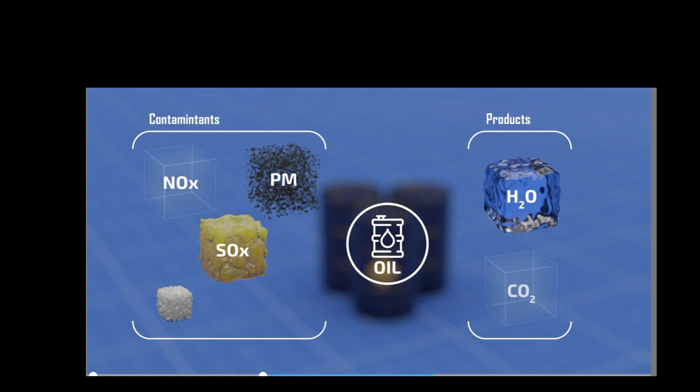A range of legislation such as emission control areas, ECAs, has already been introduced to try and limit the damage from these products of combustion, but ultimately to reduce global warming, the marine industry needs to drastically reduce the amount of CO2 and other greenhouse gases produced by shipping.

In 2023, the IMO's target was to reduce CO2 emissions per transport work, as an average across international shipping, by at least 40% by 2030, pursuing efforts towards 70% by 2040 compared to 2008. For total greenhouse gas emissions from international shipping, the target is a reduction of at least 20%, but striving for 30% by 2030 compared to 2008.

By 2040 to achieve a reduction of at least 70% greenhouse gas emissions, and then by 2050 to achieve net zero greenhouse gas emissions. These targets are only likely to be met if the use of new fuels is encouraged, and therefore a further target of the IMO is that zero or near zero emission fuels will represent at least 5%, striving for 10% of the energy used by international shipping by 2030.

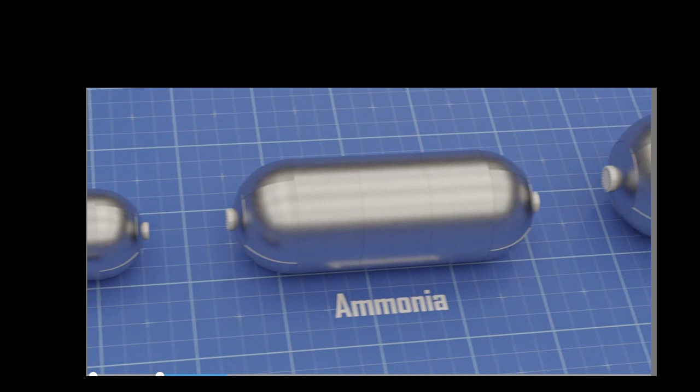There are other possibilities, such as biofuels, nuclear and battery power, but we will concentrate on 4 new fuels with the potential to reduce greenhouse gases. These are liquefied natural gas, ammonia, hydrogen, and methanol.

In order to evaluate the potential of any fuel to reduce greenhouse gases, it's important to consider not just how much greenhouse gas is emitted when the fuel is burned, but also how much greenhouse gas has been emitted to create and transport the fuel in the first place. The total emissions associated with a fuel are often described as the sum of the upstream, well-to-tank, and downstream, tank-to-wake emissions.

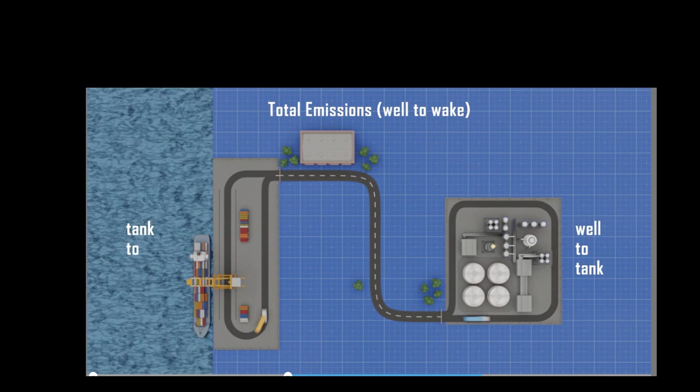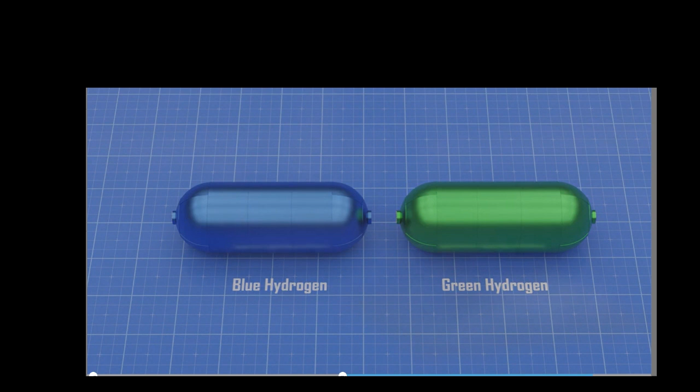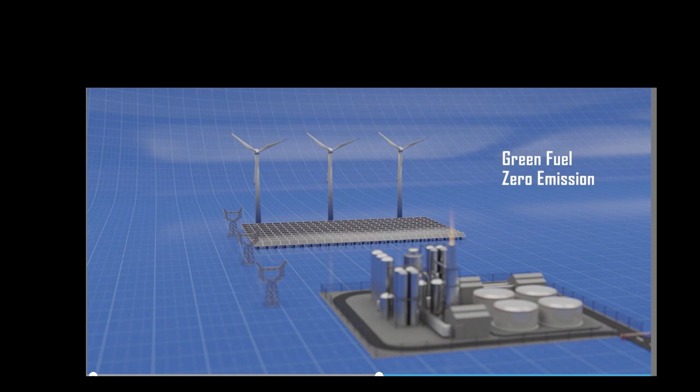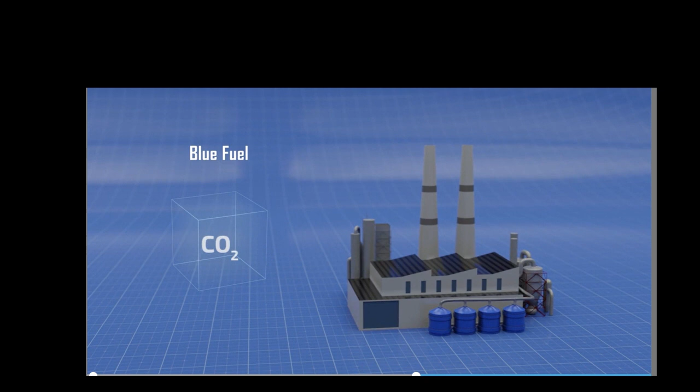In a similar way, the terms blue hydrogen and green hydrogen are used to differentiate between how these fuels have been produced. Green fuels are those produced using energy from renewable sources like wind or solar power, with no harmful greenhouse gas emissions. Blue fuels are those whose production has resulted in greenhouse gas emissions, but where, for instance, the carbon dioxide produced as a byproduct has been trapped and stored using carbon capture and storage, CCS.

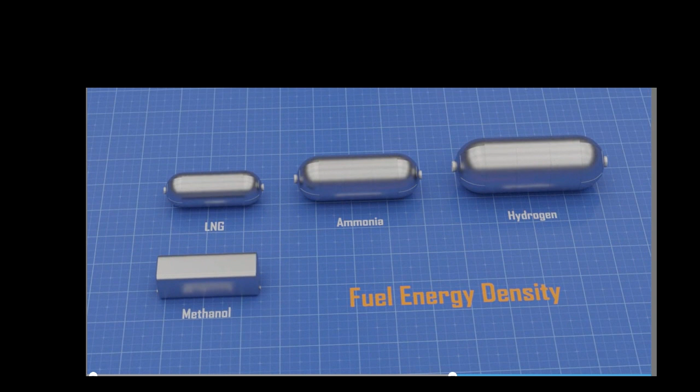The space required to store the fuels on board depends on their energy density. This is how much energy we can get out of a given amount of fuel, either per kilogram of fuel or per liter of fuel, since both the mass of fuel needed for a voyage and its volume will affect how much cargo can be carried.

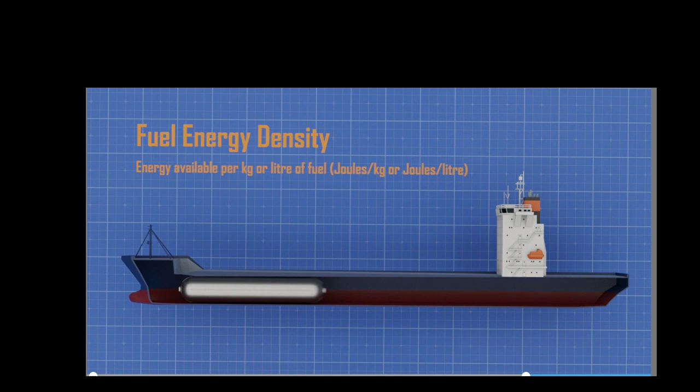For any of these fuels to become widely used, they must be reasonably available worldwide and at an affordable price. However, as with other green technologies such as wind power and solar power, history has shown that once new technologies go into mass production, costs come down dramatically and more production facilities come on stream. Most importantly, these new fuels must be capable of being transported, stored, and used safely, and each of these new fuels has its own issues, which must be properly dealt with.